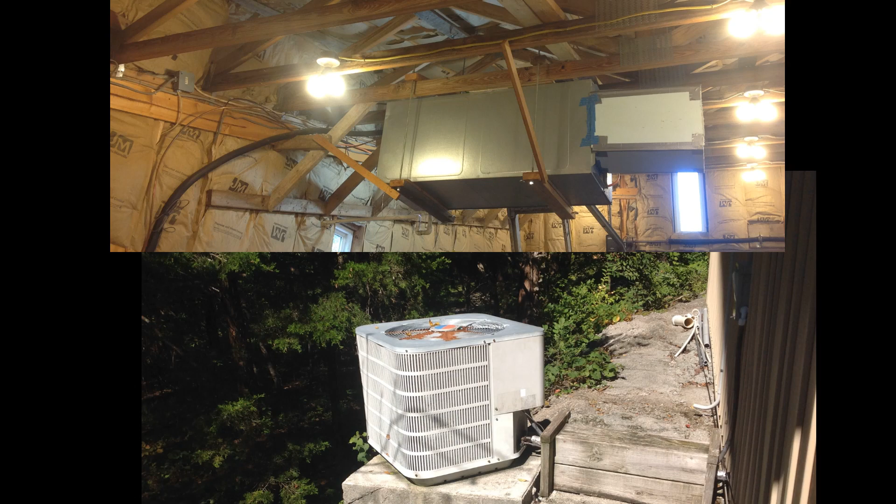Hello folks, this video deals with my attempt to install and operate an older R22 based heat pump system, first using R290 and then later R438A refrigerant as a substitute for the R22.

I'm going to talk about such subjects as superheat and subcooling. For those of you who may not have a good grasp of those terms, and in fact I think that may include myself, well versed viewers may want to skip around a bit and not listen to me drone on about those subjects.

Early in 2013, I was given a salvage split heat pump system. I decided this unit might make a nice system for my newly constructed shop. What could be better than having a free heating and air conditioning unit? The floor area of my shop was slightly less than 1,000 square feet, so I thought a 3-ton unit might be a good match.

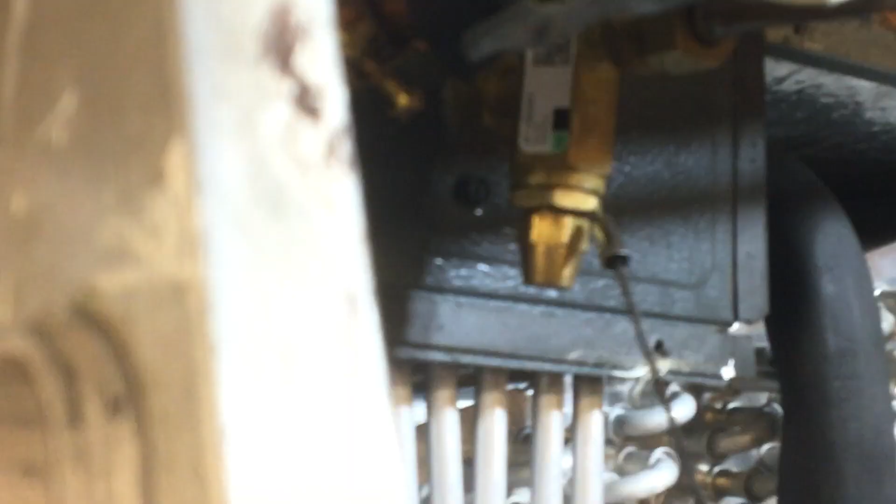Right here my pointer is resting on the expansion valve, the TXV. It goes through the metal wall, and once it passes through the expansion valve, it passes into this black insulation here and is distributed to the coil with 6 small tubes.

These tubes here are delivering refrigerant first to the bottom and to the top of the coil. So once the refrigerant enters the coil, it travels through the tubing up to the top of this half of the V.

The larger diameter tubes are the return lines, and there are also 6 of those return lines. They're manifolded together and come out into the vapor line, which you see right here.

As this refrigerant is injected into the top row of pipes, it comes out and goes all the way through this coil to the other side. Right here at about the center there is a crossover. For some reason the refrigerant traveling through the upper part of the coil is now shifted and makes the remainder of the trip in the lower coils.

It's kind of a switchover, and there is the same arrangement on the other side, but it's not visible because it's hidden by the insulated tubing over the supply tubing.

This is basically, as I understand, what would be called a 3-row coil. By 3 rows we mean there is a row of tubes that go horizontally across the coil here, a second one in the middle, and a third one on the bottom, making the 3 rows.

There are 16 tubes in each row going across from this side to the other side. Then there's a U-turn and the refrigerant comes back. So this is a standard design A coil.

However, the A coil is turned on its side, so it's kind of in a V shape. The actual coil is in a sort of V shape, with this being the lower part of the V and this up here being the upper part of the V.

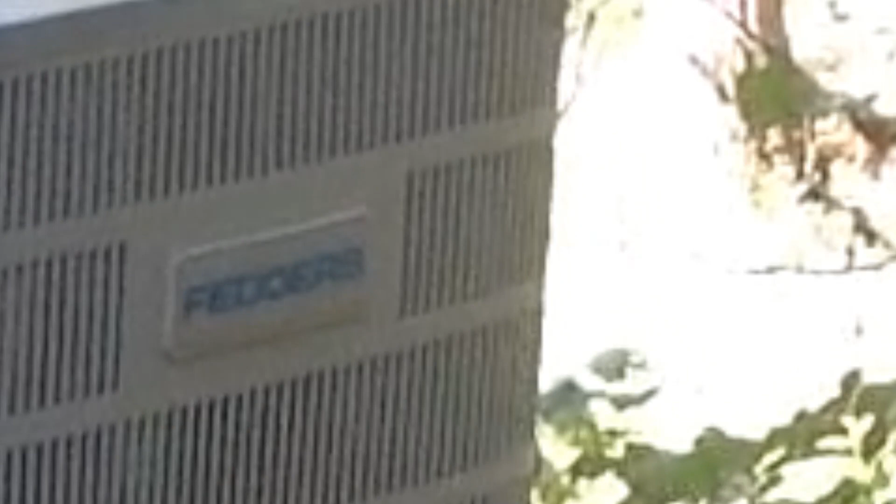I'm looking now at the outdoor unit. There's nothing really special about the installation. It's a Fedders 3-ton unit with a SEER of 12. The wood platform is just protection for the refrigerant lines running across. On the left side, you see I've placed an aluminum cooking pan, which I used to collect the condensate to estimate the latent loading on the unit.

What you've seen in the previous clip is a Fedders CH1236. The 12 stands for a seasonal efficiency rating of 12, and the 36 is for 36,000 BTUs, or a 3-ton unit. Based on the serial number, I believe that unit was built approximately in April of 2008. The indoor unit is a Goodman RARUF 36B14 multi-position air handler, which I purchased in 2013, and this system was made operational around that time.

At that time in my life, I wasn't spending a great deal of time in the shop, so any shortcomings of this system weren't immediately apparent to me. However, during the pandemic, I began spending a lot more time in the shop, and I noticed the system wasn't doing a good job of cooling, particularly when temperatures got into the mid-90s. I was also experiencing a freeze-up issue with the indoor coil, and I repeatedly checked the vapor line pressure and made adjustments to the system charge, but nothing seemed to help.

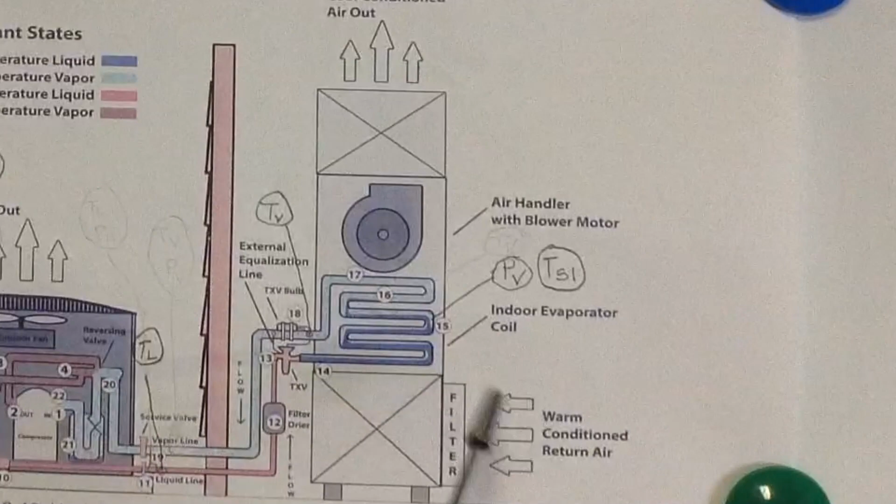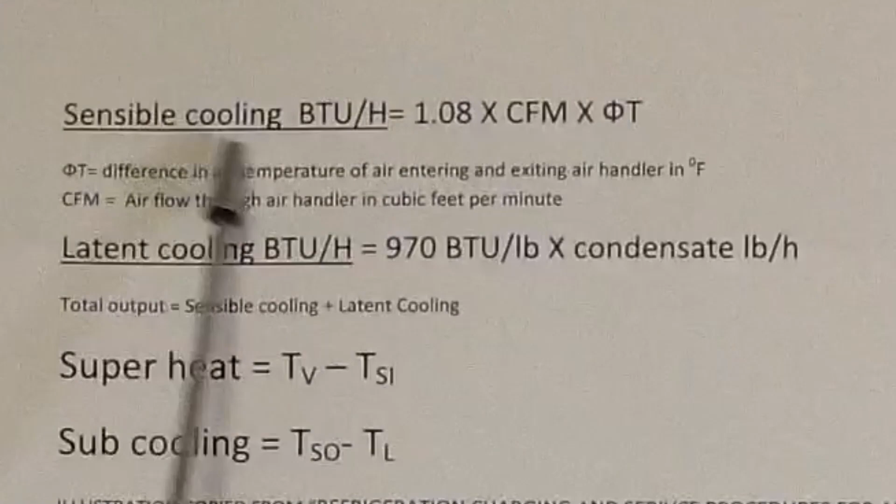My first effort was to estimate the output of the system. I used a velocity meter to determine the velocity of the air entering the machine and coming up through it. Knowing the area of the entry and its velocity, I could convert that into cubic feet of air per minute. Once you know those characteristics, you can calculate the sensible heat output of the unit using this relationship, which comes out in BTUs per hour: 1.08 times the CFM, which stands for cubic feet per minute, times the temperature difference between the inlet and outlet air.

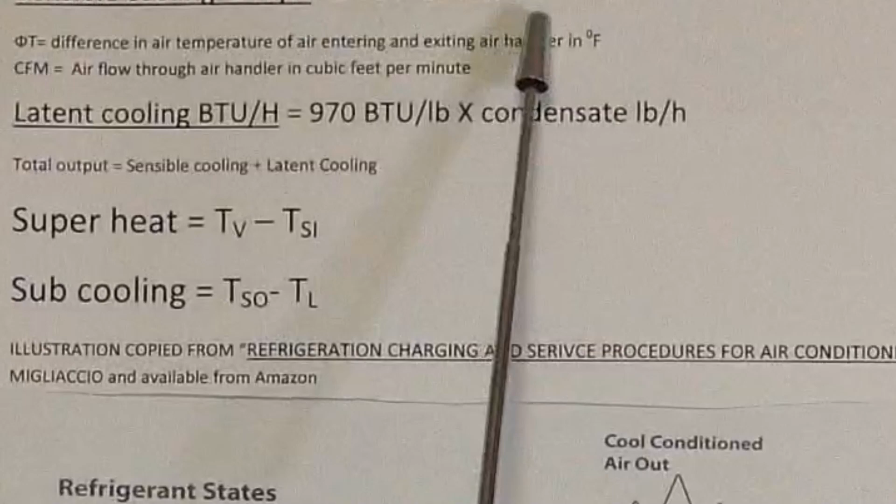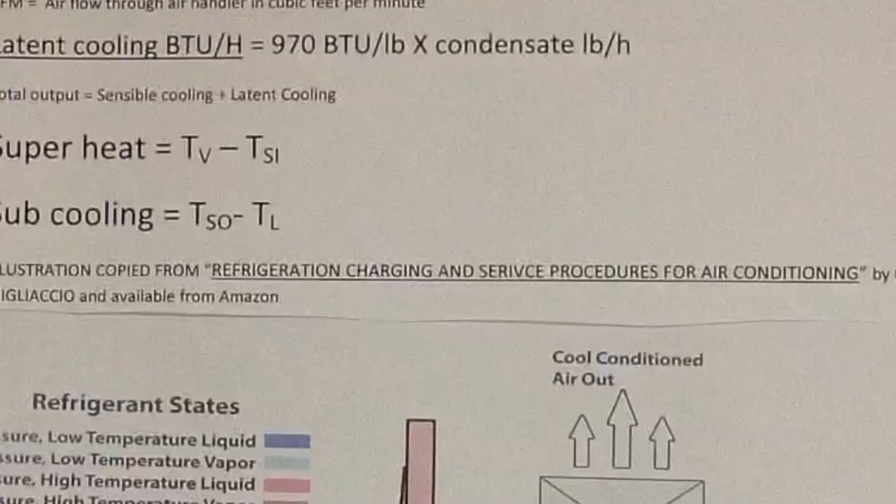Now, you notice I used the word sensible cooling. Is there such a thing as insensible cooling? Well, I don't know, but what I mean by sensible is the heat taken from the air as it passes through the air handler to drop the temperature of the delivered air. There is a secondary event going on as the air travels through the machine.

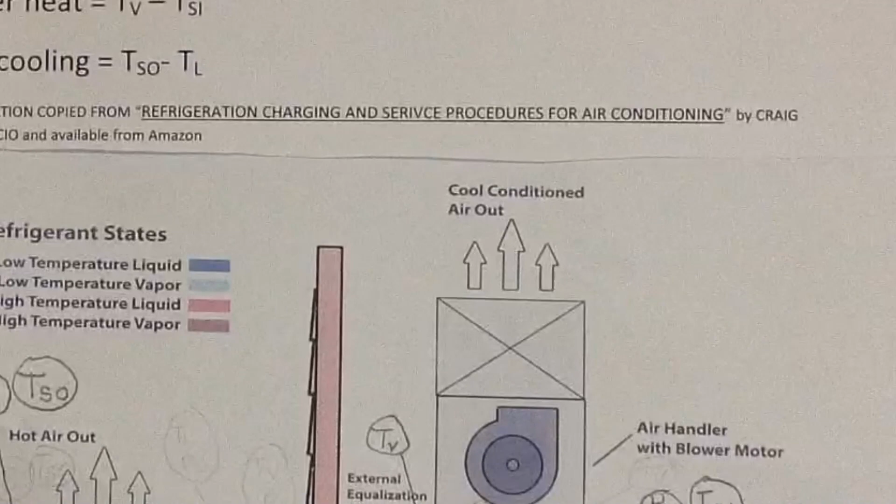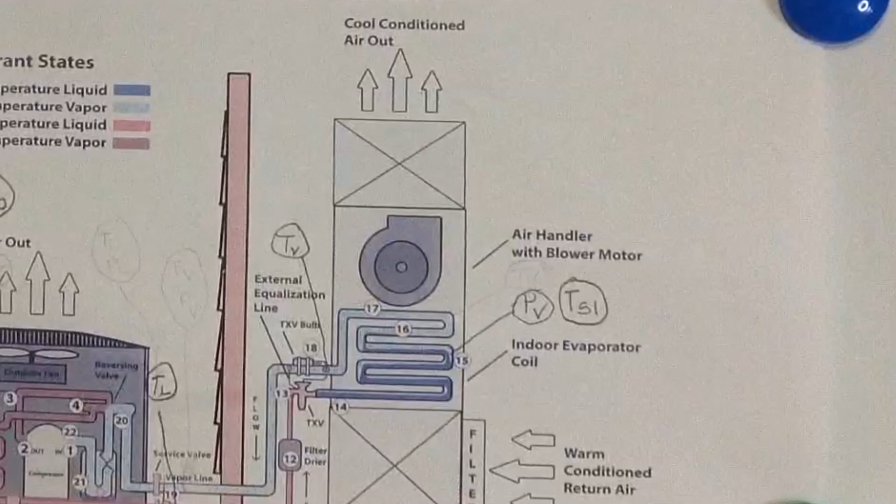There's moisture in the air, and as the air is cooled through the air handler, water vapor condenses into a liquid. The energy required to condense that condensate is called latent cooling. The condensing of the water vapor requires energy from the HVAC system. It turns out that every pound of condensate requires 970 BTUs. So if we collect the condensate for an hour and weigh it, we can calculate the latent loading on the system. That calculation should be pounds per hour times 970, or this relationship right here.

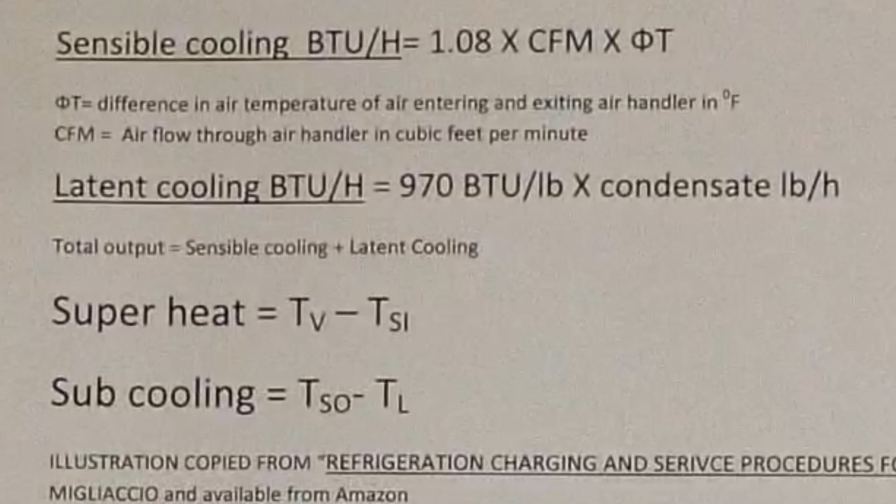The total load on the machine, the total cooling output, is a summation of the sensible and latent cooling. My first testing of the system indicated an output of only 9,137 BTUs of sensible heat. I didn't bother with the latent capacity. Usually the latent capacity may add 10 to 30% more load depending on the humidity of the air, but I was a long way from the 36,000 BTUs I was expecting from the machine.

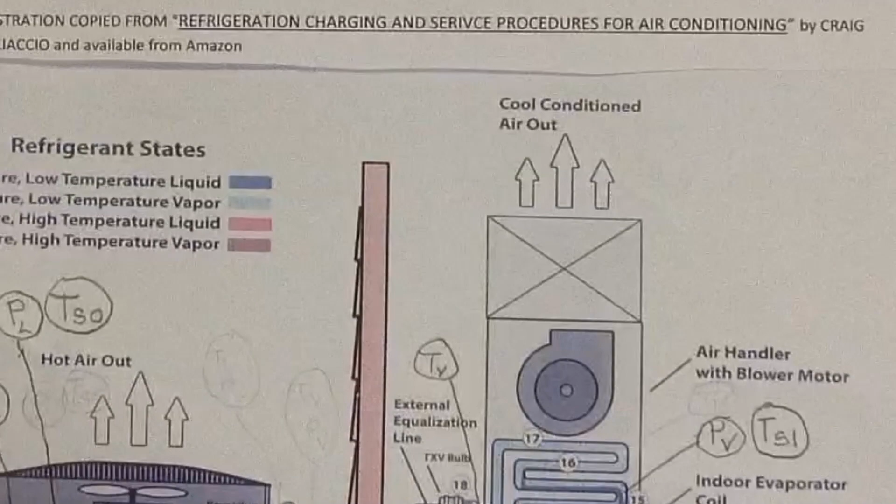Now, this exhibit I have here was actually copied from a book called Refrigerant Charging and Service Procedures for Air Conditioning. This is a great reference and was prepared to teach HVAC technicians the detail of the trade. I obtained the book containing this exhibit from Amazon, and I recommend that anybody interested in learning more about the nuts and bolts of air conditioning get a copy of it.

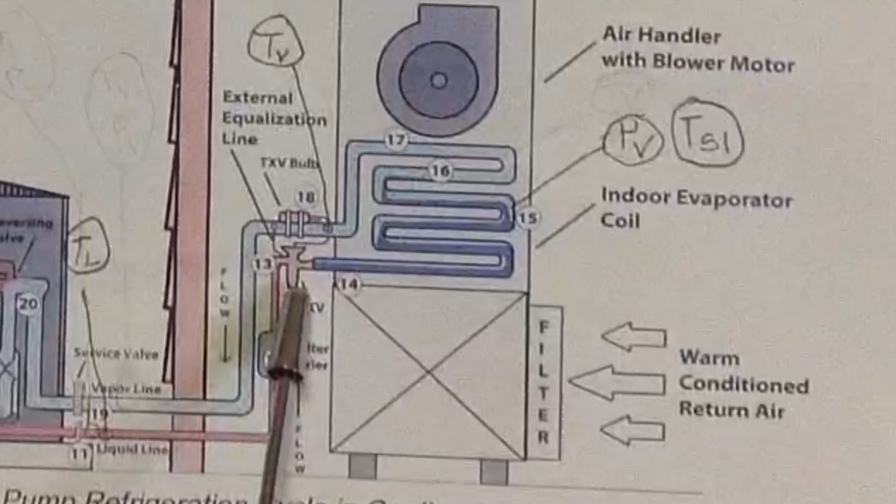Let's concentrate for a moment on the right side of this schematic. It shows the air handler with the indoor coil. There is a metering device right here, which sometimes is just a slug of copper with a hole drilled through it, but in this case it's shown as a TXV, or thermostatically controlled expansion valve. The tube coming in here is the high pressure liquid refrigerant, which might be running 150, 200 psi, maybe more. As it passes through the TXV, pressure is reduced, and this refrigerant attempts to flash into a vapor.

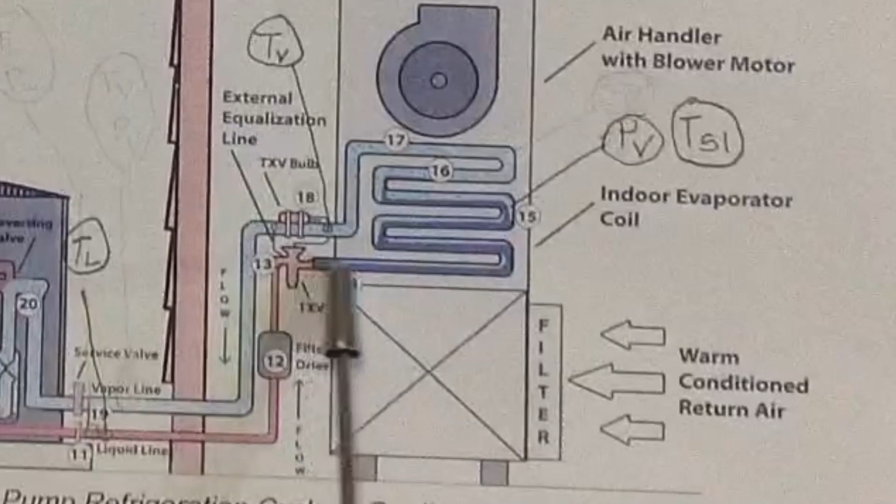The dark blue area indicates where we have a combination of boiling refrigerant, meaning there's a combination of both vapor and liquid refrigerant. The light blue area is supposed to indicate where the refrigerant has completely turned to vapor.

Now I have a label on this schematic right here. I penciled in PV, and that stands for the pressure of the vapor line, and it's basically measured at the service valve located right here at the outdoor unit.

Right here I also have another scribble called TSI, which stands for the saturated temperature of the inside coil. S means saturated, and this portion of the coil is very important because this is where the main cooling effect occurs.

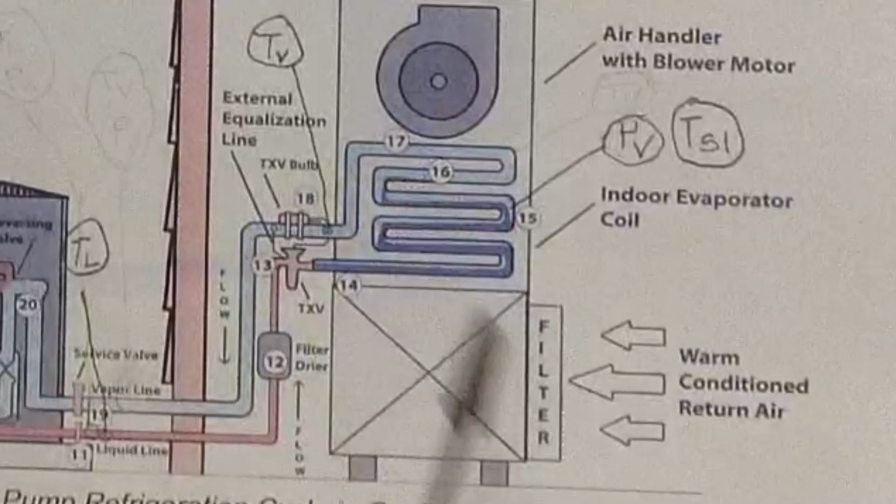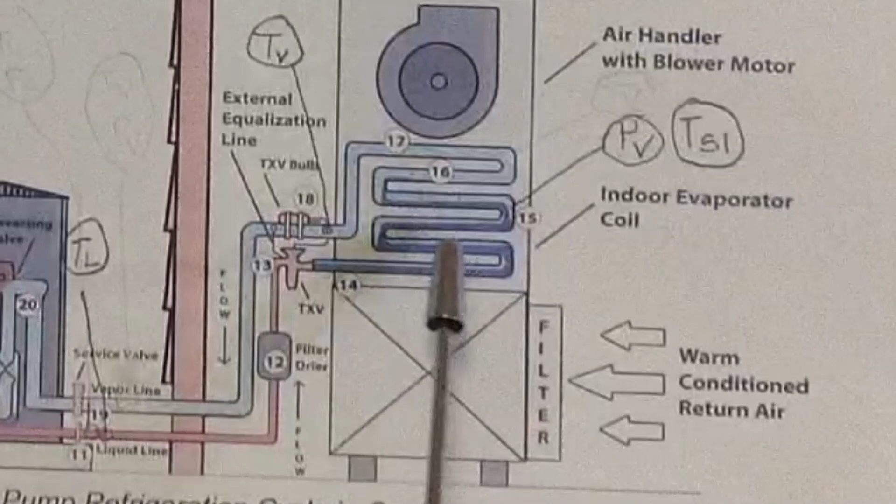If the temperature is too low in this area, the coil will freeze. This saturated portion of the coil, the dark blue area, the temperature is pretty much consistent from the bottom to the top, because as the air passing through the coil is boiling the refrigerant, the refrigerant is holding this temperature pretty constant.

But once the refrigerant gets into the situation where it's all vapor, then that portion of the coil's temperature can rise as you go up toward the top.

Now usually this temperature is measured here again at the valves. The temperature, TV, the temperature at the surface of the tubing is usually very close here and here, because this line is almost always insulated.

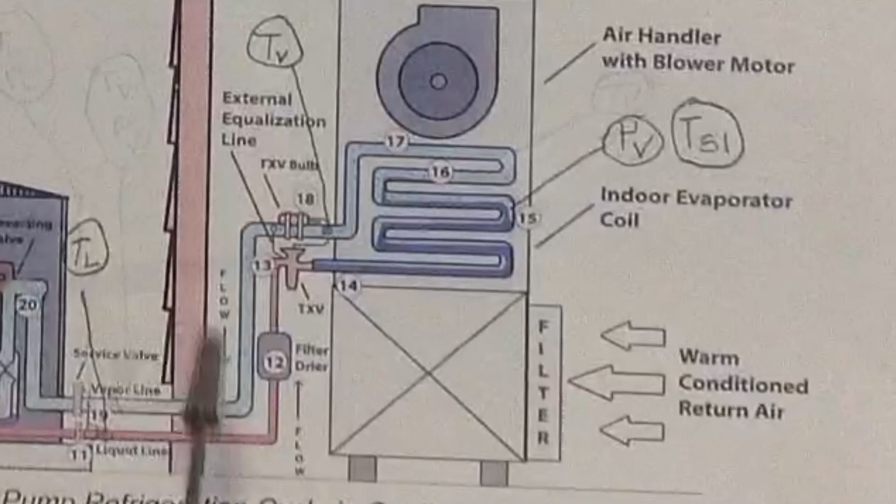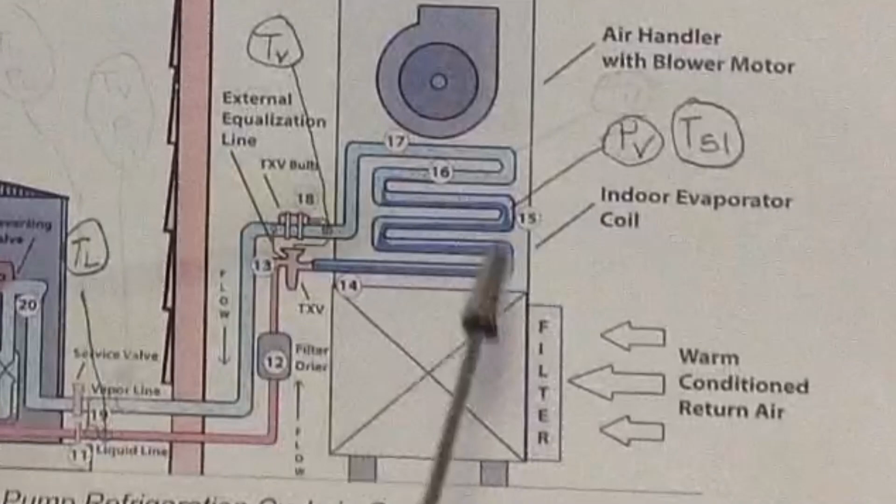Well, how do I get this temperature TSI? Once you know the pressure inside the evaporator, you can enter into a pressure temperature table published for the refrigerant that you're using and just look it up.

Now again, I referred to TV here, and let me make sure I've defined that as being the surface temperature of the vapor line, and it's very close to the temperature of the vapor passing through it.

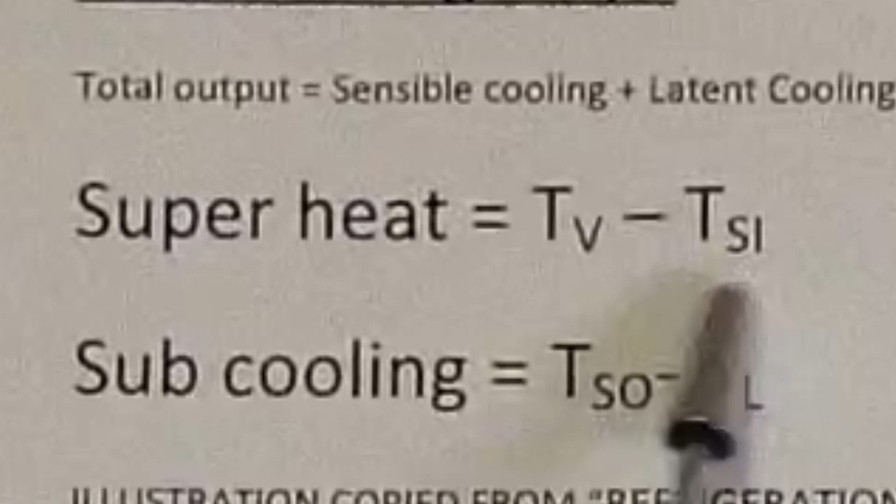Now if you subtract from TV the saturated temperature of the indoor coil, you get what is called superheat. In other words, the surface temperature TV minus the saturated temperature gives a number called superheat. So TSI is a temperature right in this area of the coil, which is pretty uniform, whereas TV is the temperature of the surface of the line as it exits the coil, either here or here.

Usually those numbers are essentially the same if it's properly insulated. A small superheat number as compared to a large superheat number means more of the coil is filled with boiling refrigerant. Maximum efficiency would be that the coil would be completely full of boiling refrigerant.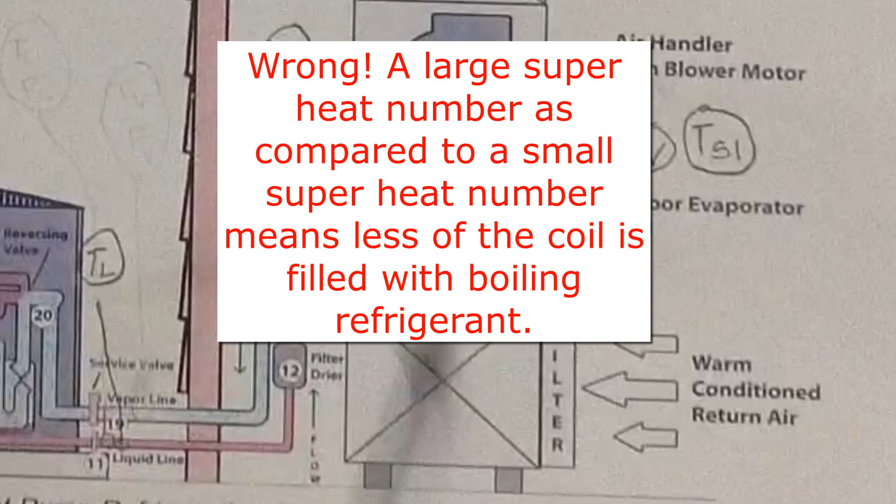However, this is dangerous because it's possible that you will begin to pull liquid refrigerant through the suction line into the compressor, and that is a possibility for causing damage to the compressor. So you always want to run your systems with some superheat.

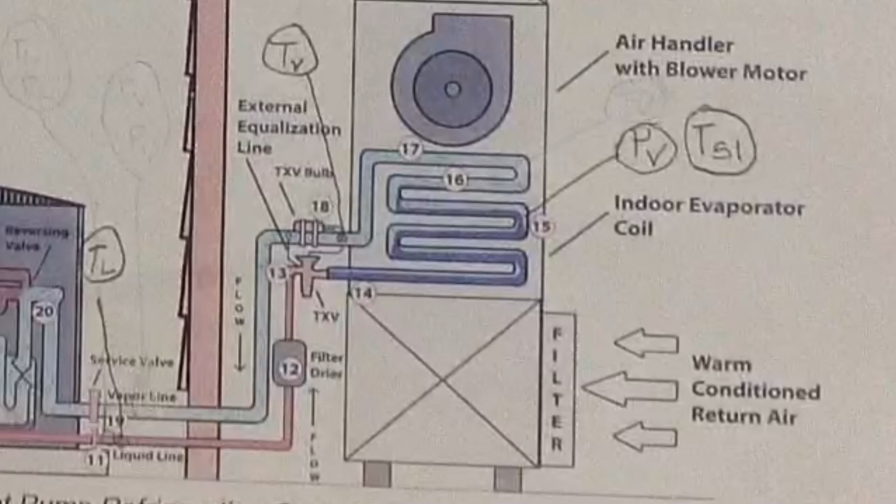Usually the manufacturer will have some data for the installer to follow, giving the recommended superheat. If the indoor unit is equipped with a TXV, which our drawing shows here, the superheat is automatically controlled, assuming the system is properly charged.

If the upper part of the evaporator coil has only vapor in it, the temperature of this portion of the coil will climb above the temperature of the saturated portion. In other words, this temperature is almost guaranteed to be slightly higher than this. And again, we'll get back to the concept of superheat.

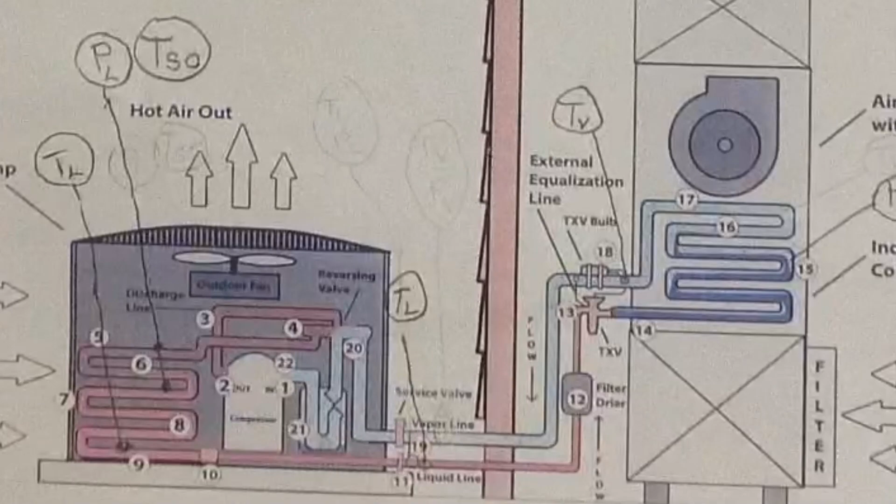There's at least one other factor of operation of the HVAC system that needs to be monitored. On the left side of the schematic is located the outdoor unit. The compressor, shown here in white, discharges in a dull red color into the top of the outdoor coil.

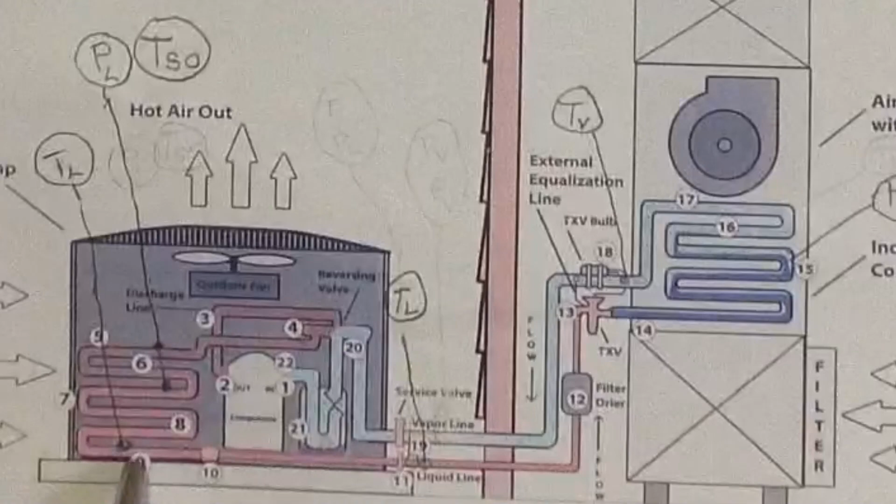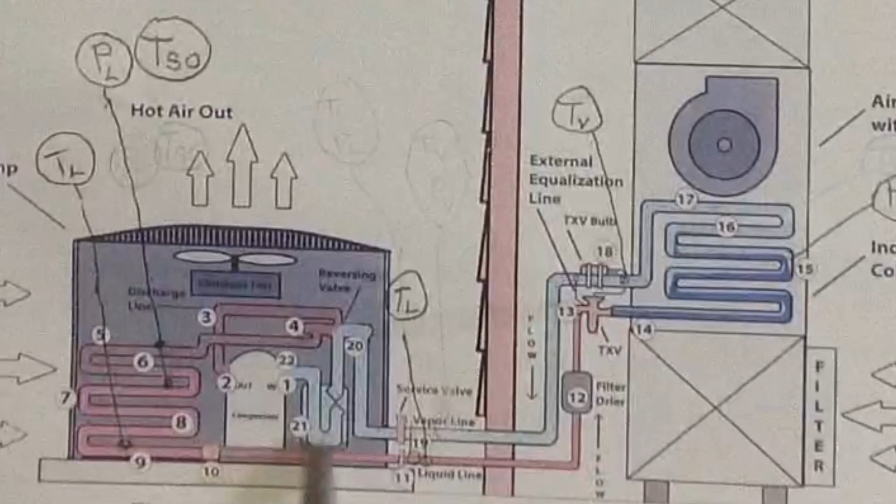As the refrigerant moves down, it's rapidly condensing, and hopefully by the time it gets to the bottom of the coil, it's fully liquid. It's important that this be completely condensed, because if you have a mixture of vapor and liquid passing through this line going to the coil, you have increased friction loss in the line itself due to the space taken up by the vapor, and also the TXV, or metering device, is usually not designed to handle a mixture of vapor and liquid.

Similar to what we were discussing before, I have a label here which I've called PL, which stands for the pressure inside this condensing coil, and it's usually measured here at the service valve.

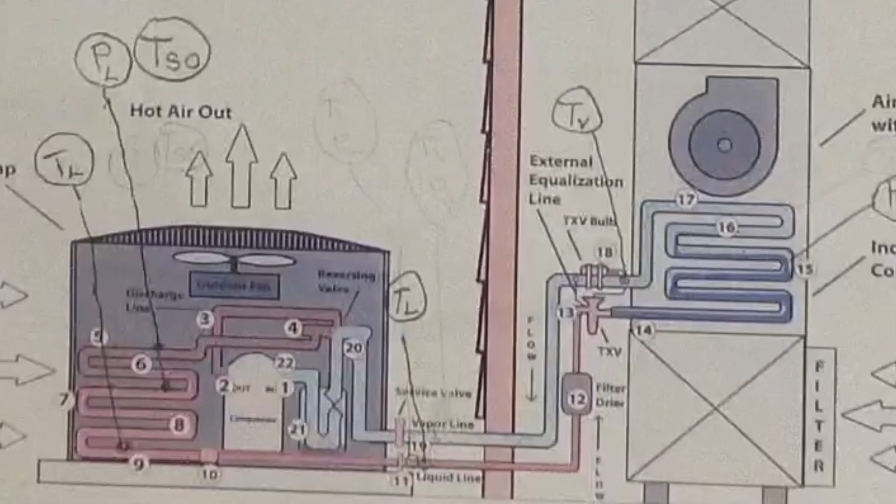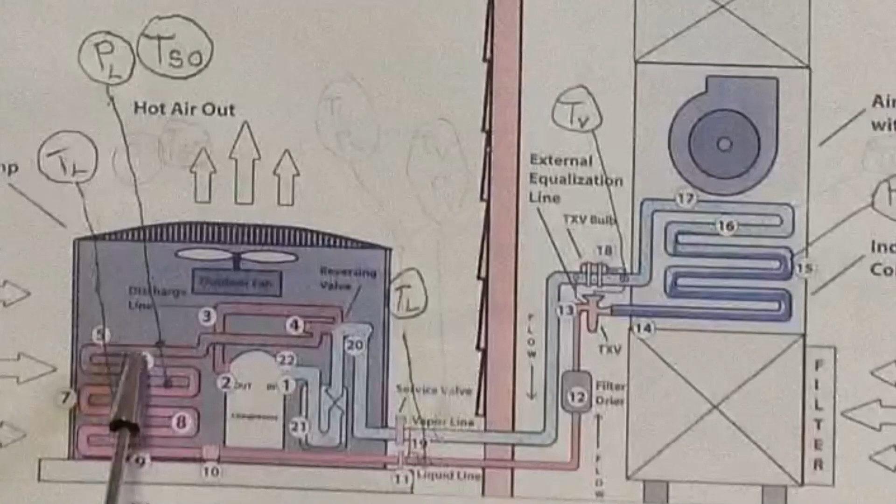I've referred to something I called TSO, which is the saturated temperature of this condensing coil. That temperature is pretty much uniform from the top down until you have nothing but liquid in the line. It stays constant because all the heat being liberated into the space is going into turning the refrigerant back into liquid. But once it's liquid near the bottom of the coil, it can cool below this TSO temperature.

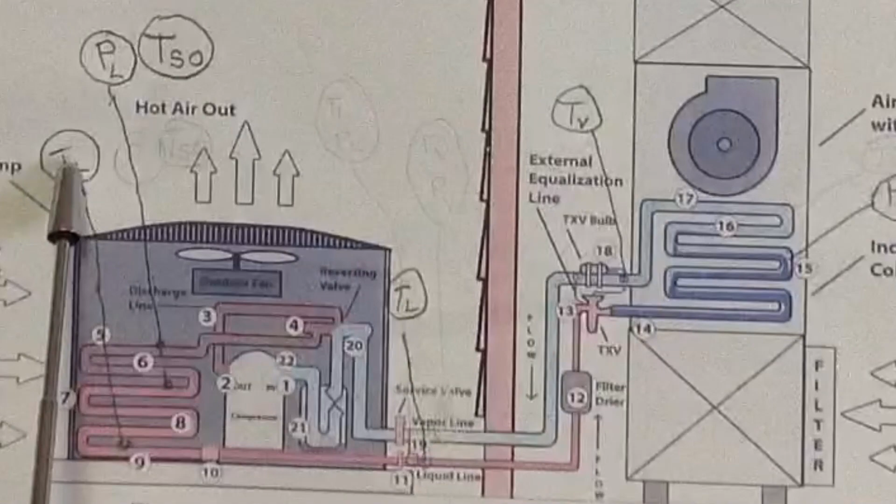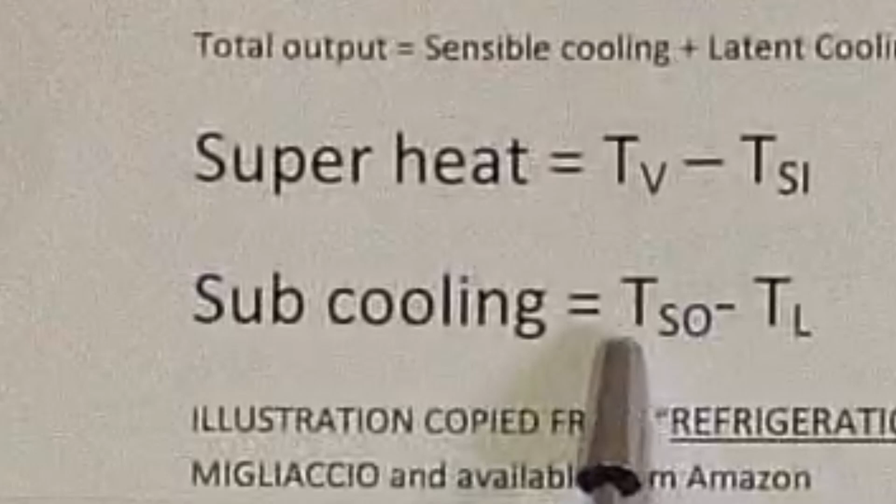I've called the surface temperature of the liquid line TL, and usually that's measured outside the condensing unit, right in the area where the service valves are. So we have a term called subcooling, which is the difference in temperature between the saturated portion of the coil, TSO, and TL, the surface temperature of the liquid coming out of the machine.

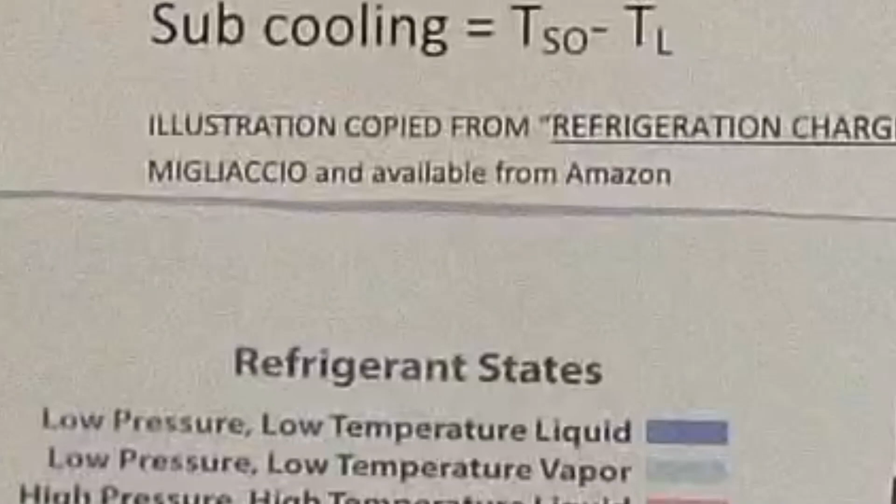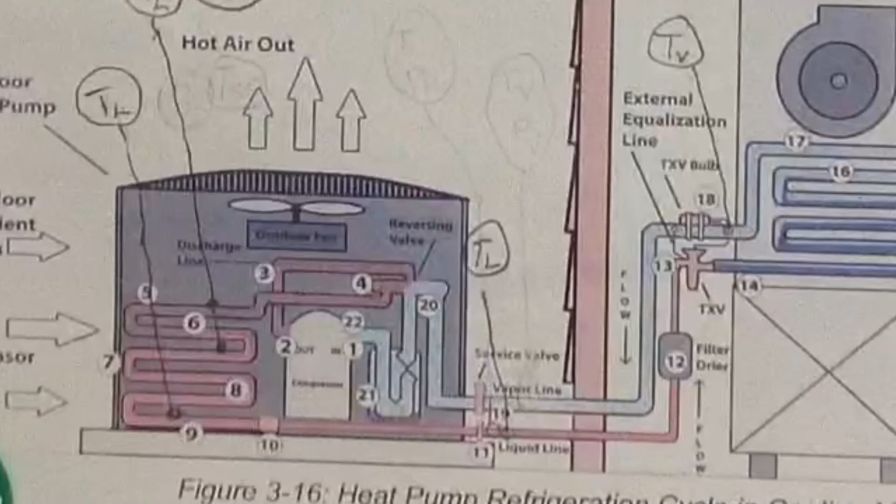This number is an indication of whether or not the refrigerant has been turned completely into a liquid before exiting the machine. For air conditioning small systems, this subcooling difference is usually somewhere in the 8 to 14 degree range, depending on the loading and machine design. In my unit, I was seeing a subcooling figure in the 14 to 19 degree range, and the superheat was really high at 42.9 degrees.

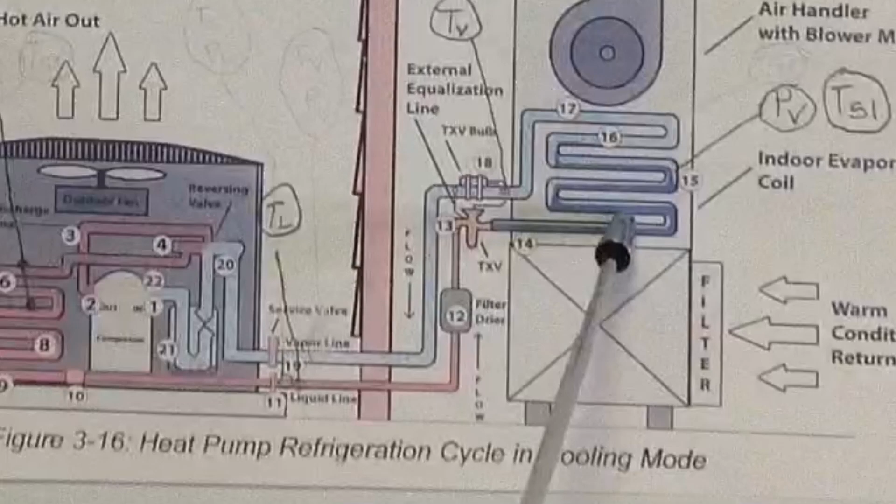There's no ductwork on my machine, so I could actually reach right in and use an infrared thermometer to check the surface temperature of the coil as I moved from the bottom to the top. With the TXV in place, the surface temperature took a jump when I'd only moved about 25% of the way up from the bottom of the coil toward the top.

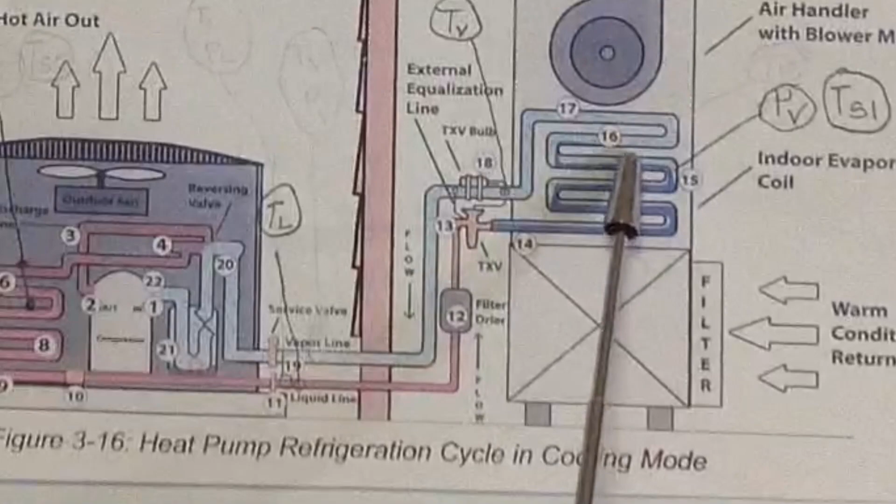This meant most of my cooling coil really wasn't doing any cooling, because the cooling occurs where the refrigerant is being evaporated, and there's very little, if any, cooling once the coil is completely full of vapor. So only the first 25% or so of my coil was involved in the cooling operation, and it suggested maybe I had a problem with my TXV.

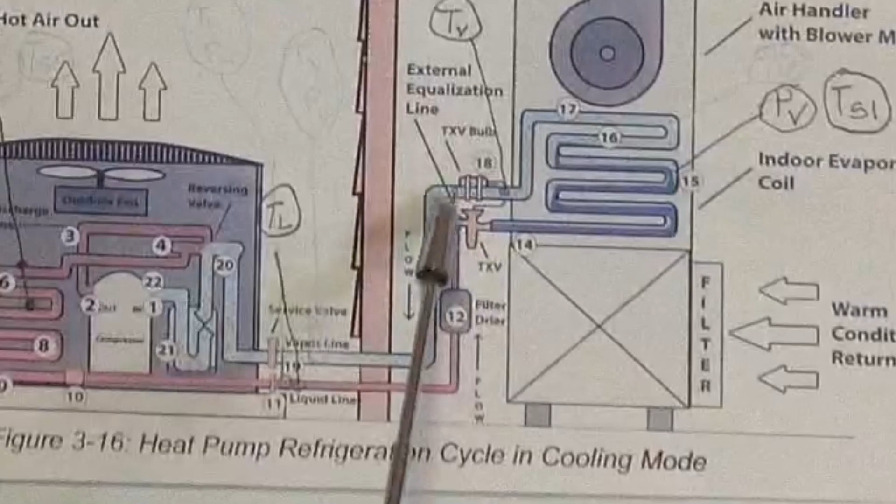I decided to remove the TXV and installed in its place a .078 piston. With the piston, there's no automatic control here—it's just a slug of copper inserted in the line with a hole in it that's .078 inches in diameter.

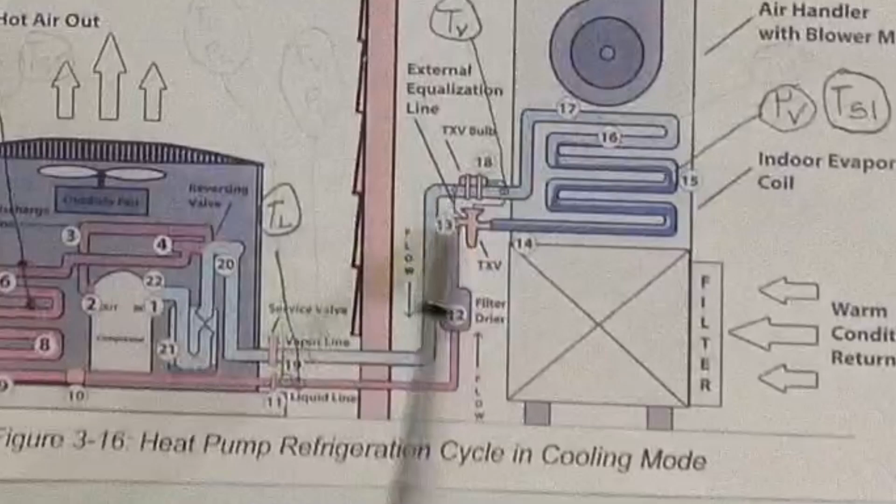When I checked the sensible output, I was disappointed because it had actually gone down a bit. After completing this test, I removed this .078 piston and replaced it with a .082, and then finally replaced it again with another piston that had a 0.109 inch hole. Here is a table where I tried to condense 20 or 25 pages of handwritten notes into a summary of my test results.

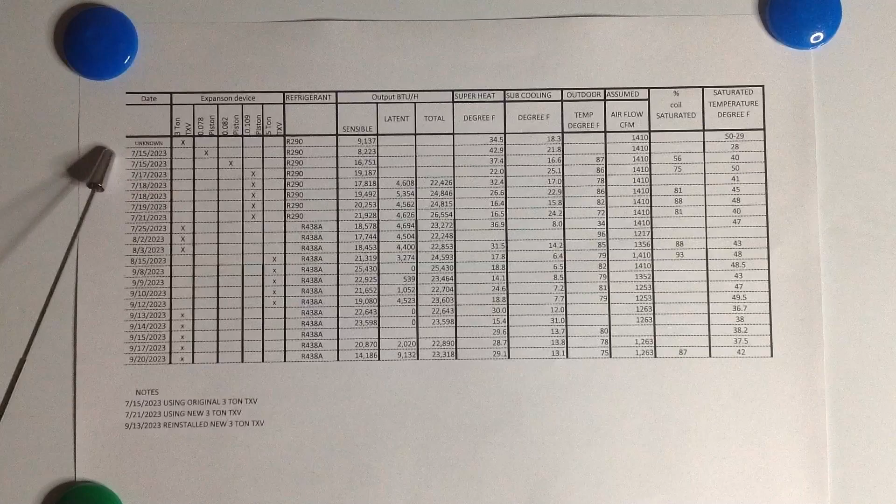I start here back in July 17th, or 15th excuse me, and there's one earlier entry up here that I didn't record the date for. My handwritten notes weren't as complete as I'd like in some cases, but in this upper portion we're using refrigerant R290, and this shows the various results of my tests.

The ongoing problem I was having was that as the unit operated, it would start out just fine, everything seemed okay, but within an hour or hour and a half, the saturated temperature of the evaporator coil would continue to drop to the point that it got cold enough to begin to freeze, and the coil would freeze up. In fact, this first line shows my saturated temperature starting out maybe at 50 degrees and then sliding down to 28, 29, well below freezing, and pretty soon the coil would freeze up.

I tried to adjust the charge, but nothing seemed to help, and I assumed my TXV wasn't working properly, so I decided to replace it. The first change I made was to replace it with a piston, and that piston had a hole in it with a diameter of .078 inches.

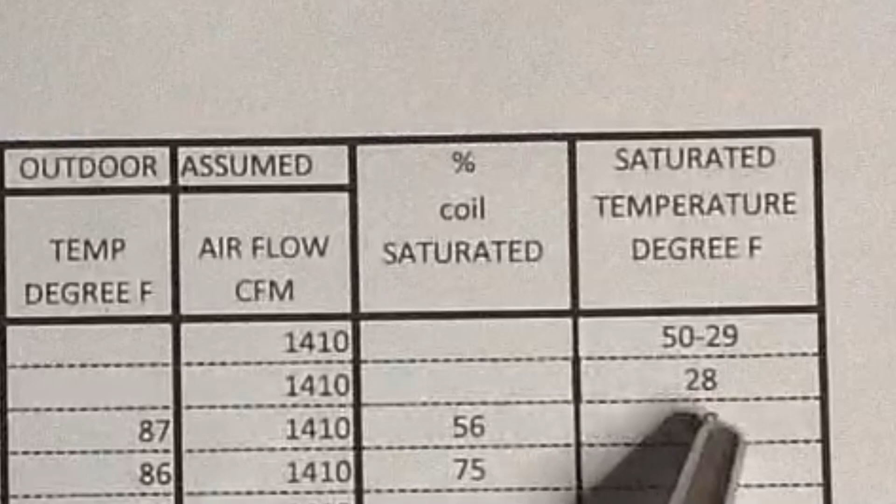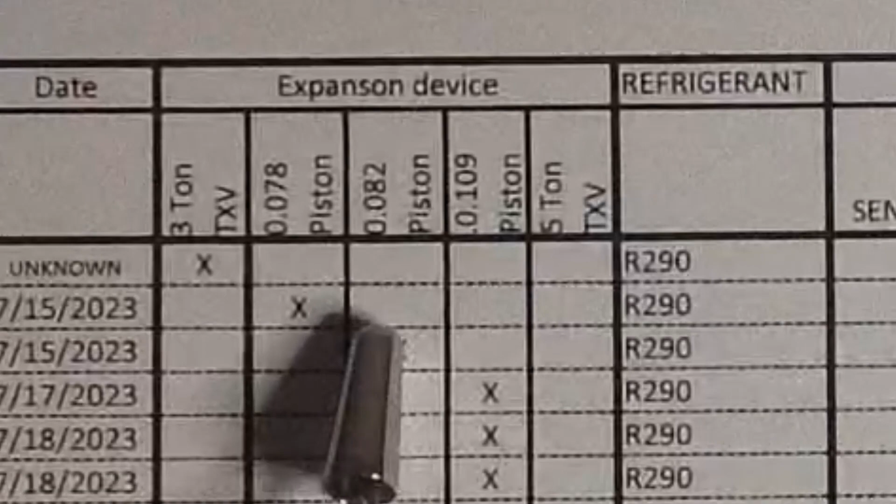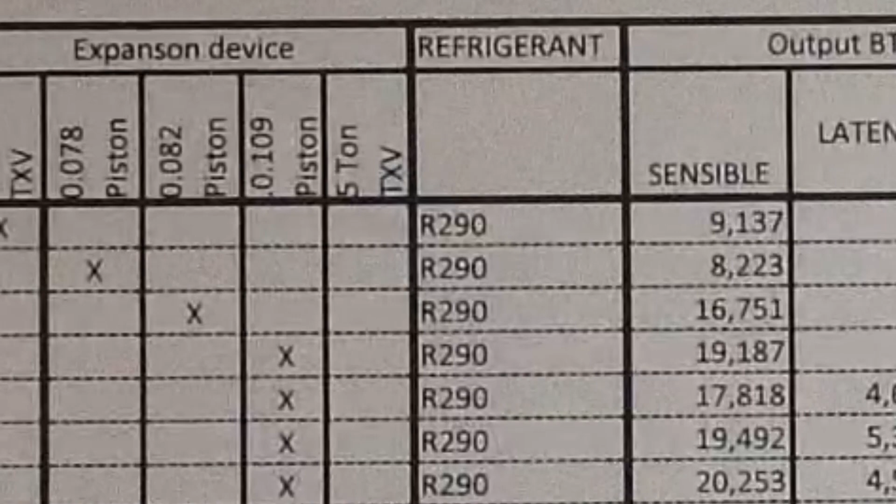Immediately I got a suction temperature below freezing, so I knew that wasn't going to work. I went back, pumped the system down, and replaced it with another piston that had a .082 hole through it, and got a sensible output of 16,751. I don't have a latent figure here because it was running so low—I didn't think it was worth the time to estimate both sensible and latent load until things started working a bit better.

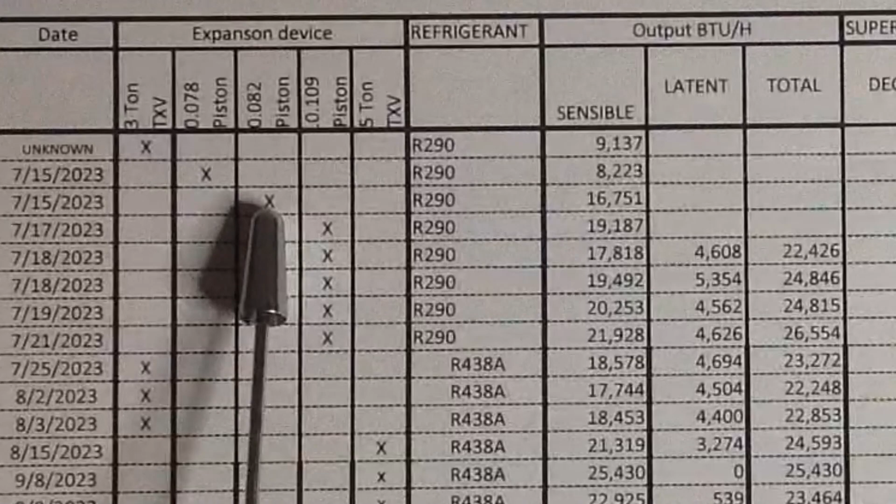I did see some improvement. First of all, I started out with sensible output of only a little over 9,000 BTUs. Then, when I took the TXV out, it actually slid a little below that. Then when I got up to a 0.082, I was getting up to about 16,751 BTUs.

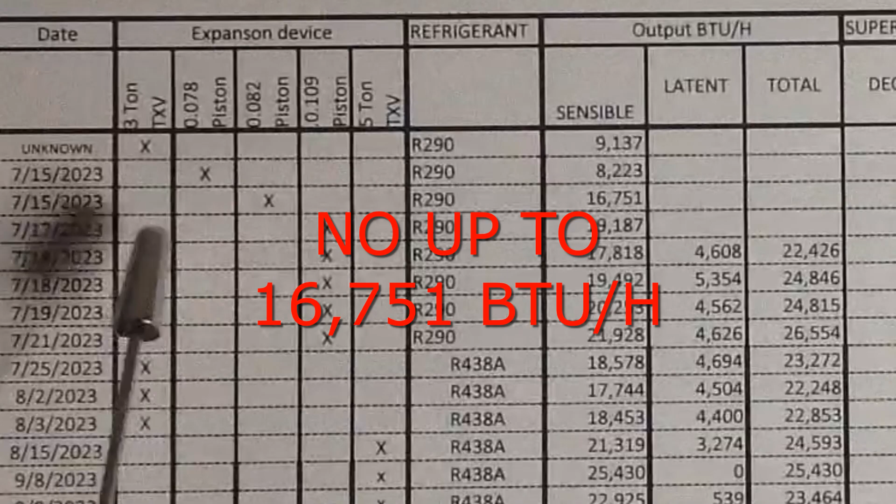Finally I decided to go for broke, and I drilled out one of the pistons to a 0.109 inch diameter hole, and again, got a respectable sensible output.

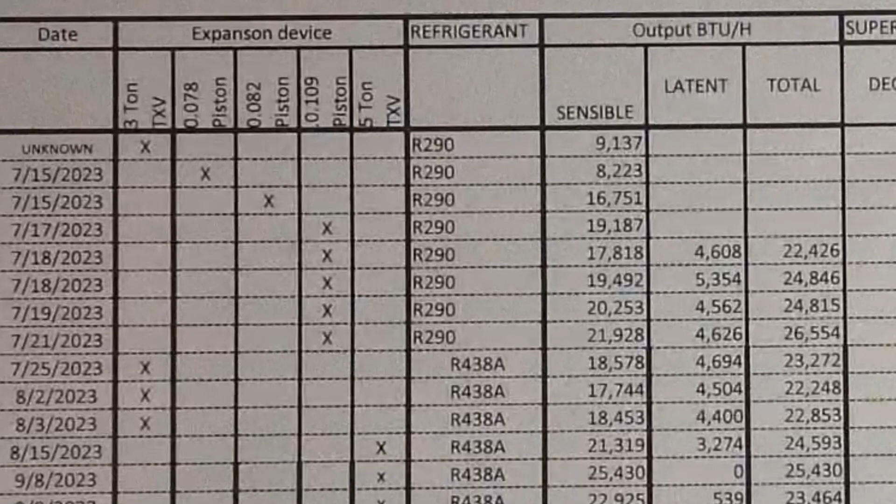At this point I began to weigh the amount of condensate I was getting. I would collect condensate for 15-20 minutes, weigh it, and extrapolate that into an hour. From that, assuming so many pounds of water produced per hour, I could estimate the latent heat. I was beginning to get figures around 22,000-24,000 BTUs.

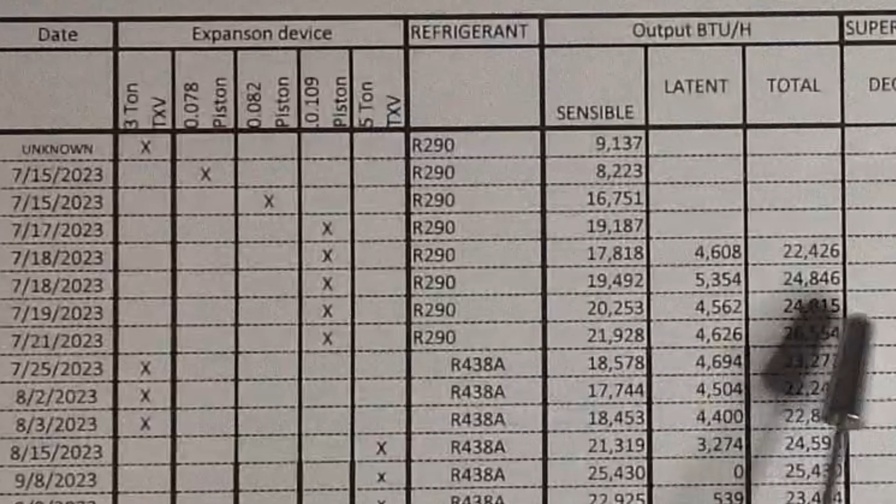I was trying various things through here. Things were getting better, but I still was way short of my 36,000 BTUs total.

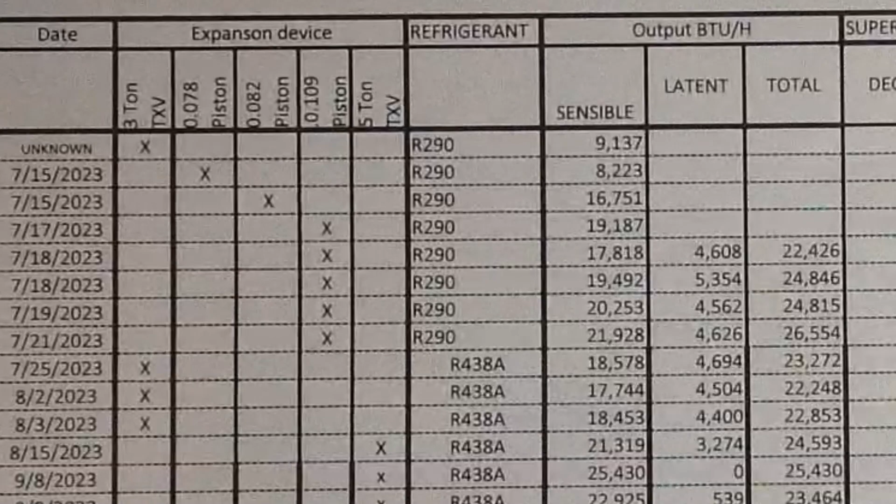I noticed that at times my saturated temperature seemed to be sliding up into the 45-48 degree range, and I had a suspicion that the saturation temperature was even warmer, because I had done a check on my pressure gauges, and I believe my low pressure gauge is actually reading somewhere between 6 and 8 psi lower than the actual pressure in the system. So this saturated temperature, I became very suspicious it was actually running warmer than what I indicated on my tables.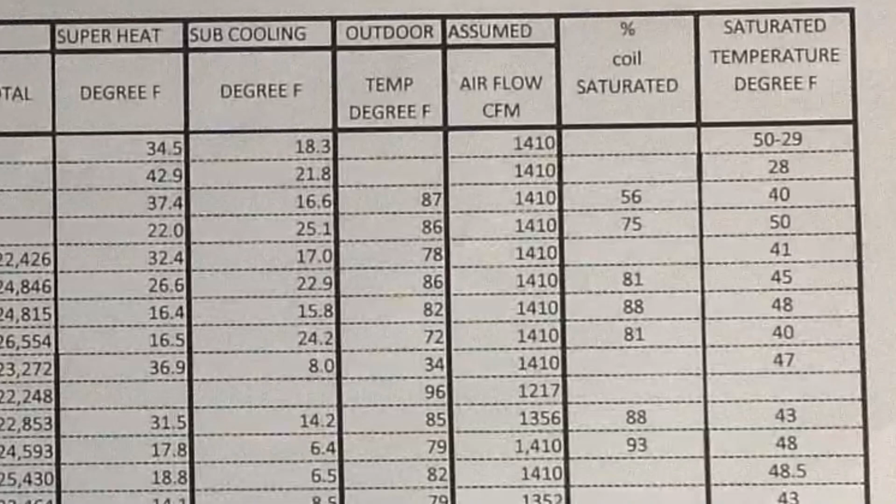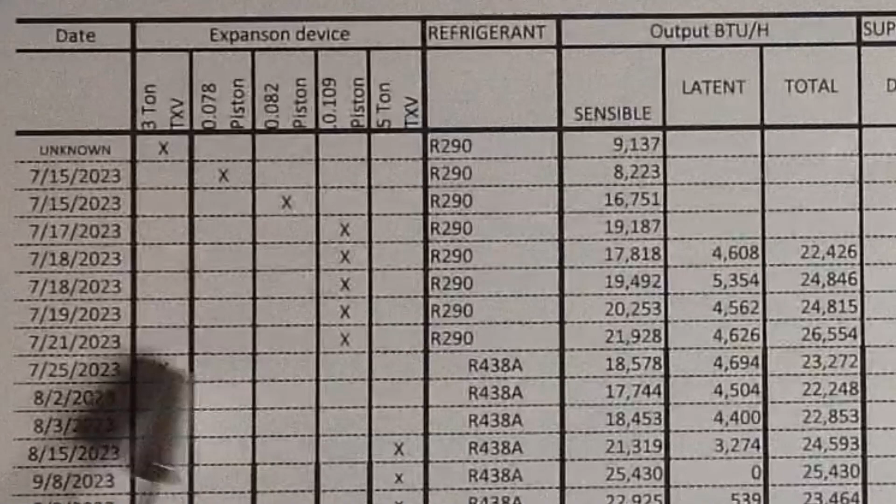Of course, this refrigerant is R290, propane. It is flammable. As I've said, I wasn't too worried about that in my shop compared to my home, but I decided, since I had a cylinder of R438A, to switch over, and at the same time I bought a new 3-ton TXV.

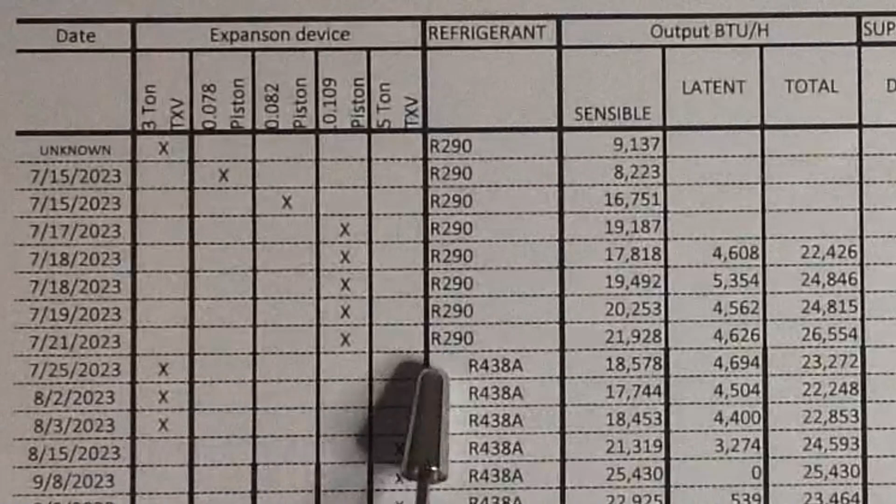That came into effect right here on the 25th, and you can see that I was getting around 23,000-24,000 BTUs of output from the unit, still way short, and I was trying some various things with this TXV.

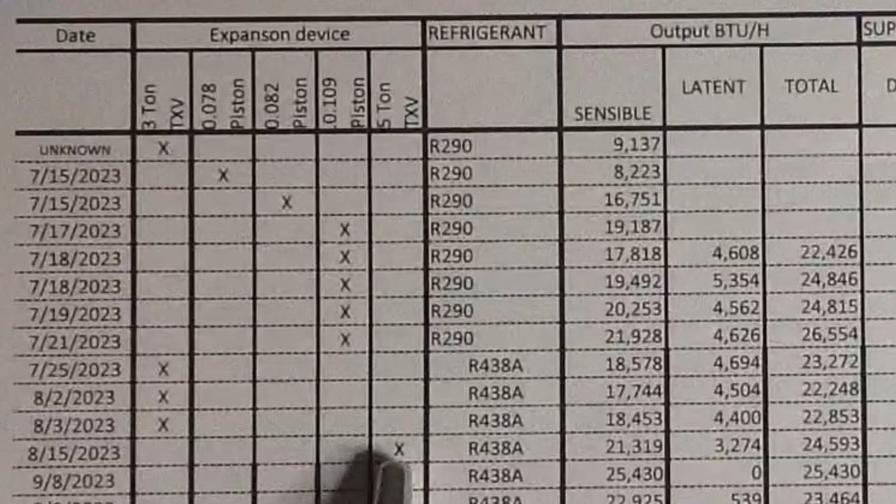So I decided to go for broke, and I put a 5-ton TXV in here. Again, the total output really didn't climb.

I didn't do any better, and I began to worry, because I was starting to get subcooling down well below what the manufacturer recommended for this unit. So I thought, well, I'll go back to my new TXV, my new 3-ton TXV.

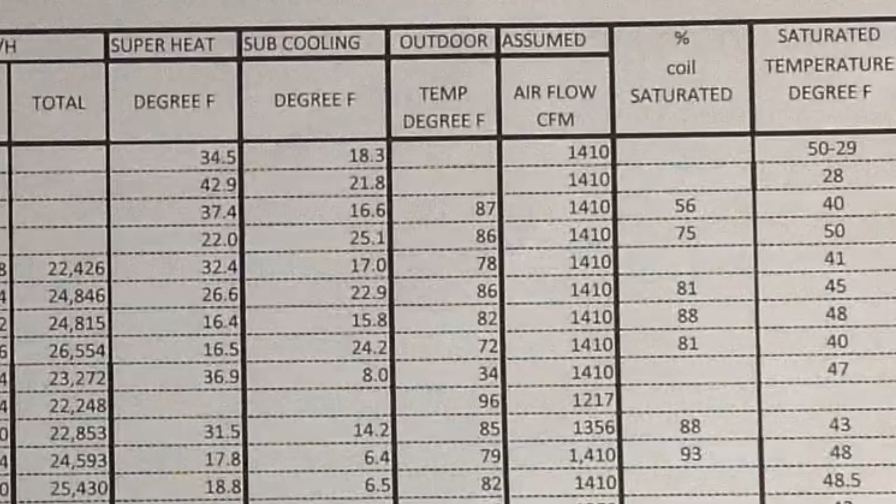Here on the 9/13, I went to the new TXV, still using the 438, and I began experimenting with trying to get the subcooling and superheat more or less in line with what the manufacturer recommended, while trying to keep a fairly close watch on the saturated temperature, because obviously if my coil got too warm, I would not get a good heat exchange with the incoming air through my air handler. I couldn't get it cooled enough if the suction temperature became too high.

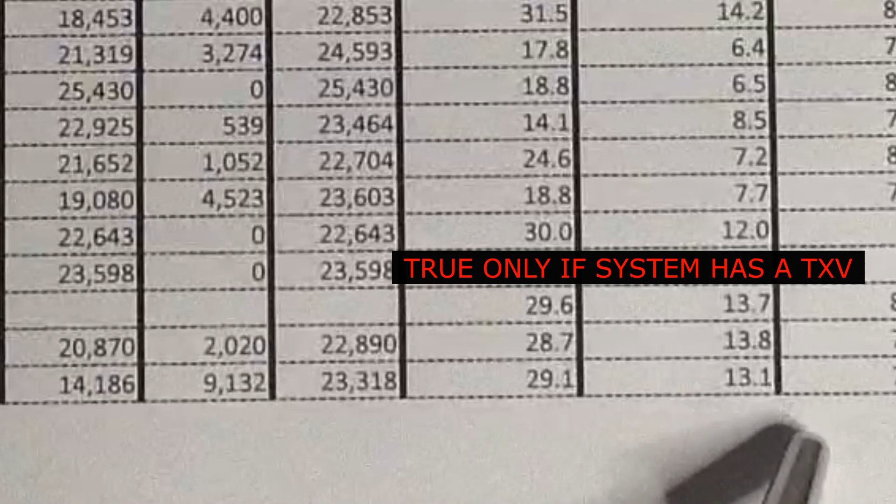Now, the manufacturer recommended that you charge your system based on subcooling rather than paying too much attention to the superheat. They recommended that, at 60 degrees outdoor temperature, 12 degrees of subcooling, going up to a little over 14 degrees subcooling at 110.

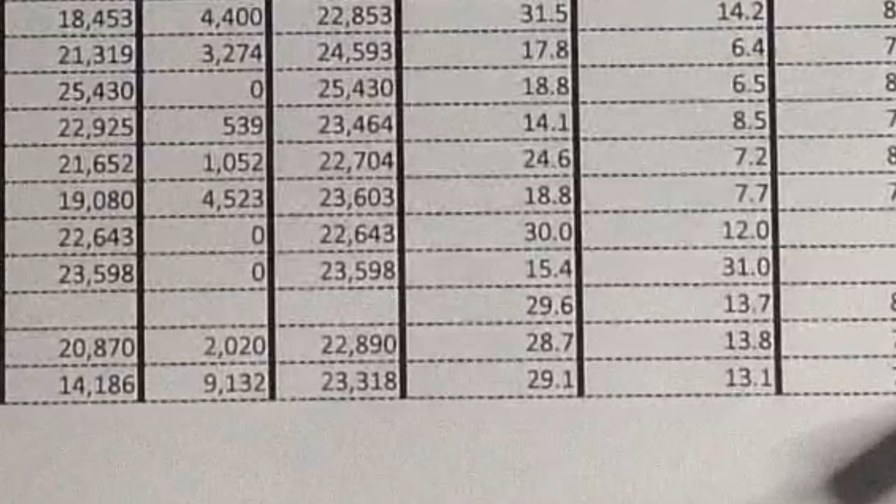So, on this last one, I do have the subcooling here at 13.1, pretty much in range. My superheat is a little high. My subcooling is pretty good, but my superheat is a little higher than I'd like.

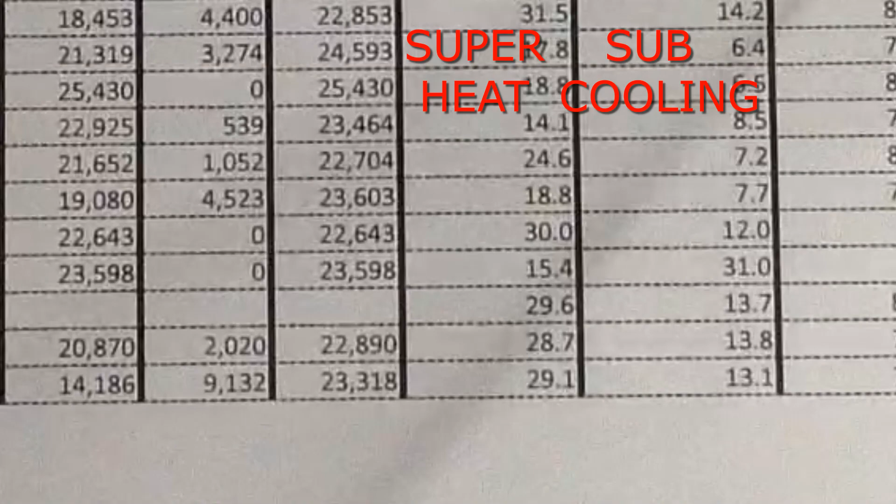I did go in, and I have a column here I call the saturated coil, the percentage of saturated coil that's being used. What I did was go in and measure the surface temperature of the coil as I made my way up from the base, and then estimated what percentage of the coil was full of refrigerant that was boiling.

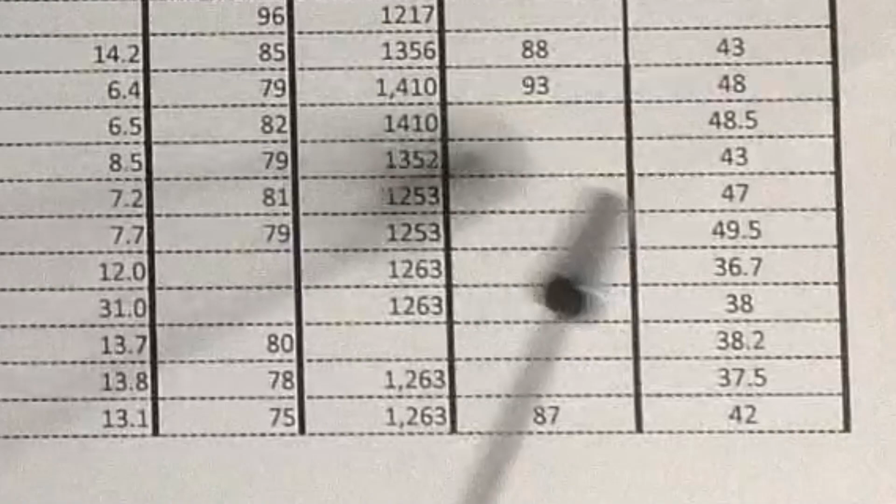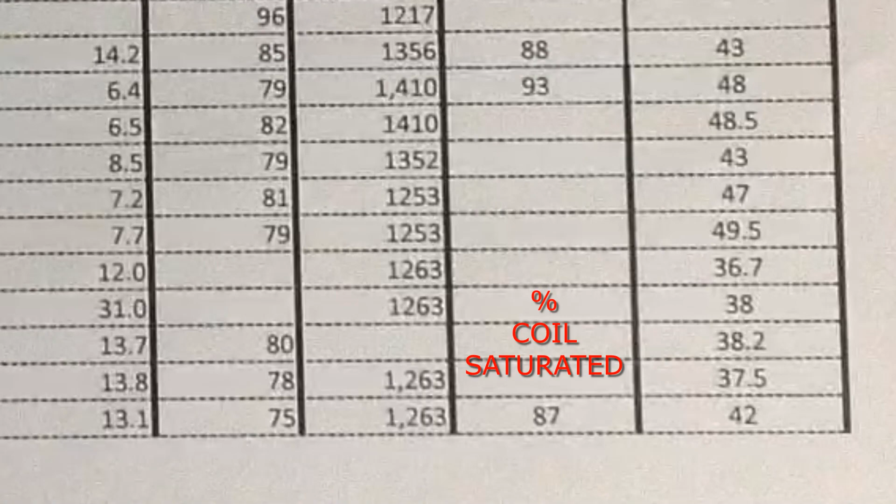In any situation here, we have a portion of the coil that has a combination of liquid and vapor, and then as it all turns into vapor toward the top of the coil, the temperature will climb, staying fairly stable where there's a mixture of both liquid and vapor. The best situation is to have the coil 100% full of boiling liquid. However, you don't want to operate that way because shifting operating conditions could cause you to suck liquid freon back into your compressor and cause damage to the unit.

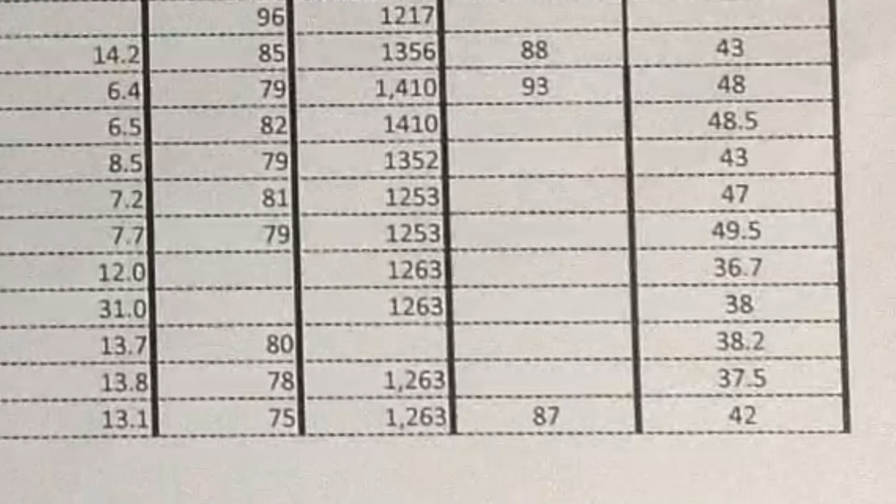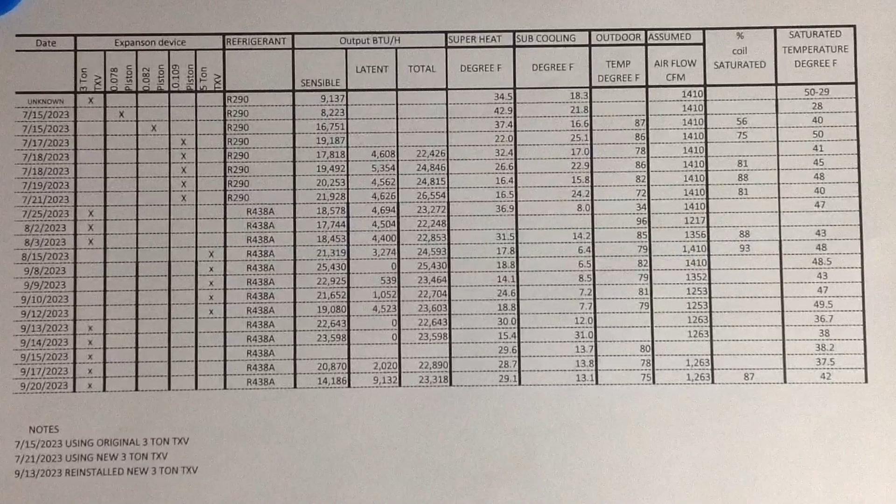All of this, well, 20-something tests I've recorded on this paper, it seems as though I'm sliding in the 22,000 to 25,000 BTU output range, around 2 tons. Almost any amount of changes I make, I'm just not reaching my rated capacity of around 3 tons.

So what's the issue? Could it be that the reduced capacity is a result of wear and tear on the old outdoor unit? While scroll compressors have a number of failure modes, my limited search of the internet and other sources hasn't indicated that reduced compressor capacity or flow capacity is a typical failure mode for the scroll type compressor. I may be wrong, maybe it does happen, but thus far I haven't found it. So at this point, I don't hardly think that's really the problem with my capacity loss.

Could capacity loss be the result of mispairing the Goodman indoor unit with the Fedders outdoor unit? Well, the box size of the Fedders and Goodman air handlers are almost identical, perhaps the Goodman is just a tad longer. I haven't been able to find data on the A coil to check if they have the same square footage of coil, but at least on the surface, at this point, I'm not sure that I think that is an issue.